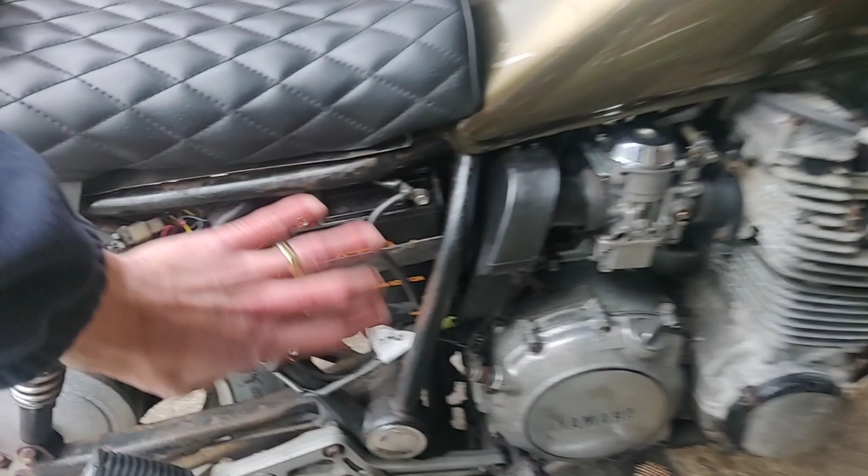Stupid evening, I shouldn't be sober, I'm dangerous. So looking at relocating the battery, looking at thinning out this mass of stuff at the back.

It's also fucking huge, it's a 12 ampere hour battery, quite a chunky battery actually for a relatively small-ish bike. But what I did find was looking around for gel batteries that get a tiny bit smaller - I don't think that's an acid battery - but it's still a lot to hide. Whereas looking at lithium ion ones, as you can tell, they don't weigh anything. Look at that, it's brilliant.

I was just pissing around really, thought well, sat in front of the telly, made up a box. I was looking for a box around the same size, but now I think, tagged on the back - you're getting no benefit of that at all, but actually that builds up my seat nice and highly.

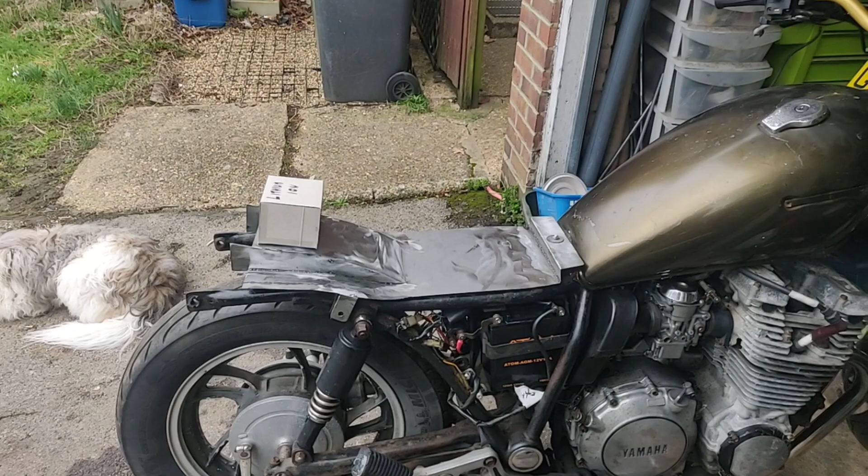Speaking of which, I was looking at it thinking, well, if I'm going to go for a black theme on the bike, I could go for a black and silver number plate because it's an old bike, a historic bike. No, the rules have changed again, and not everyone knows this.

So, oh Christ, 5-6 years ago, UK government changed the law on black and white number plates. It used to be before 1973, I think, you could have a black and white number plate. They then accidentally changed it when they changed the historic tax rules, and basically anything over 40 years old could have a black and white number plate.

They've changed that 2 years ago, I think 2021, and it's now effectively, if it's registered before the 1st of January 1980, it can have a black plate. So this can't - it is registered, built in 1980, but not 1st of January. So it's going to be a yellow plate, which is a bit of a pisser actually.

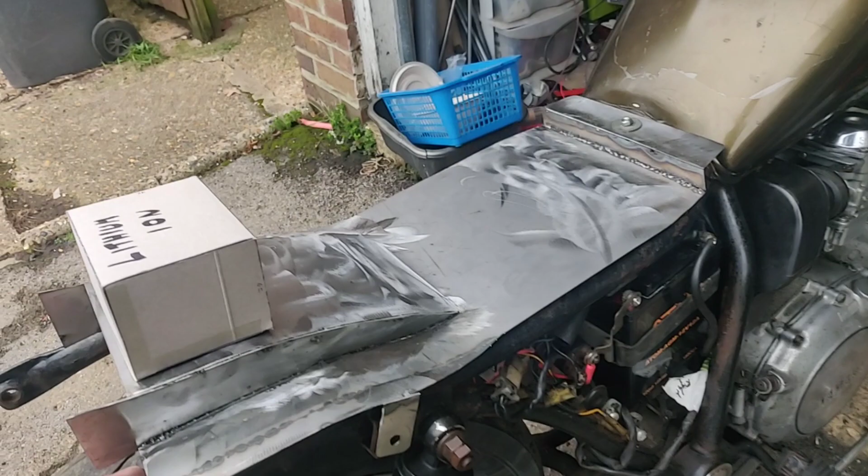I'm slightly annoyed because a black and white plate would have looked awesome, but it's all about where you can mount the plate. So I can have a lovely, relatively flat black back profile. I am going to have to leave a bit of space, obviously, like I have there for the swing arm to swing.

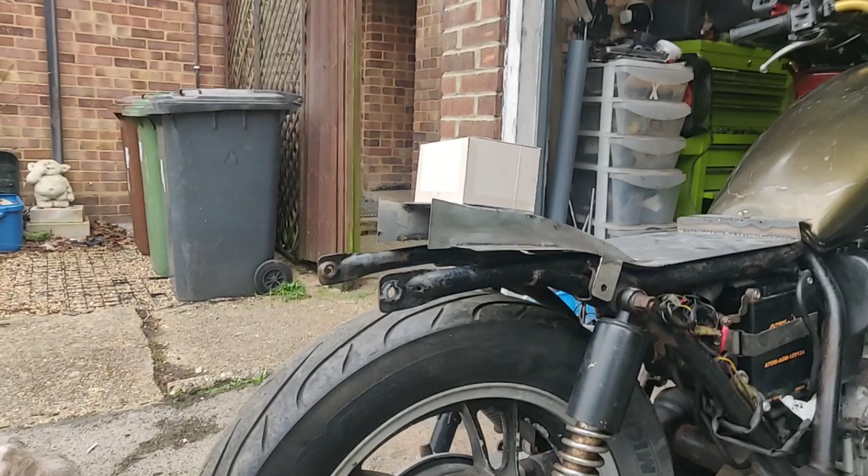But I need a bit of a plate for the plate. So my thinking is, and I've not done this yet, I'm doing it live because you're joining me thinking, which isn't normally a group sport.

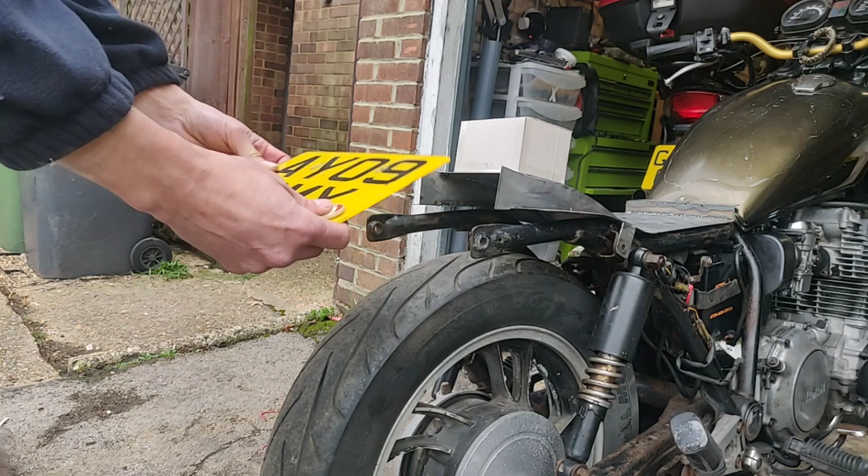This isn't a plate from the bike. What's this from? Oh, it's from the Shiver. You know, if I've got something built up to hold that battery, it holds the plate up there, which actually is probably not far off what I'm after. That's my thinking, let's bring it around here a little bit.

Oh, look at that, might even sit flush. So I don't think that's all that far off. That's a little bit tight there, but if I get rid of that bottom piece, which is just an advert anyway.

So I think I'm going lithium as far as batteries are concerned. We'll have to see how that works out in the long term. I know there are issues with lithium batteries, less than there were, overutilisation, etc.

I was worried about charging because I had read about it needing a different charger. It does, it just can't use one of the old retro ones, and I do have some more modern chargers that will work. That wasn't my concern. My concern was, if you can't charge it off a standard battery charger, how does the bike recharge it? But that doesn't seem to be as much of an issue as I initially thought.

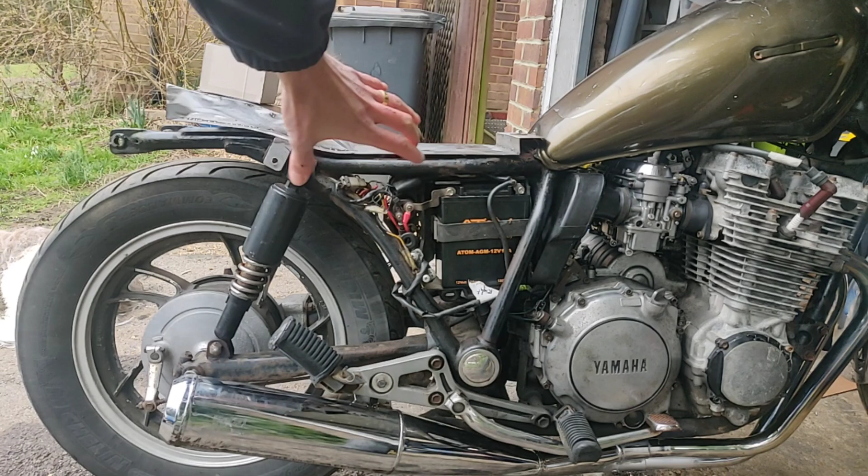So anyway, let's get on with it. What I'm going to do is get the carb off today, see if I can sort out that high idle, which I think I know what the problem is, and see if I can get rid of that airbox and just start thinning out that area. So put my little fake battery away, get rid of the plate, take the tank off, and then start digging this carb out.

Right, so there we go, that's stripped off. I've just basically pulled the manifolds out, chucked them down the side.

Hey, what are you doing, dog? Lady, what are you doing?

Yeah, tank off, seat off, etc. Hot air blower - I mean, these aren't bad, they're still pretty good as far as rubber's concerned, but a little bit of heat, if they start feeling a bit brittle, goes quite a long way. Let's see if I can rock these bad boys off.

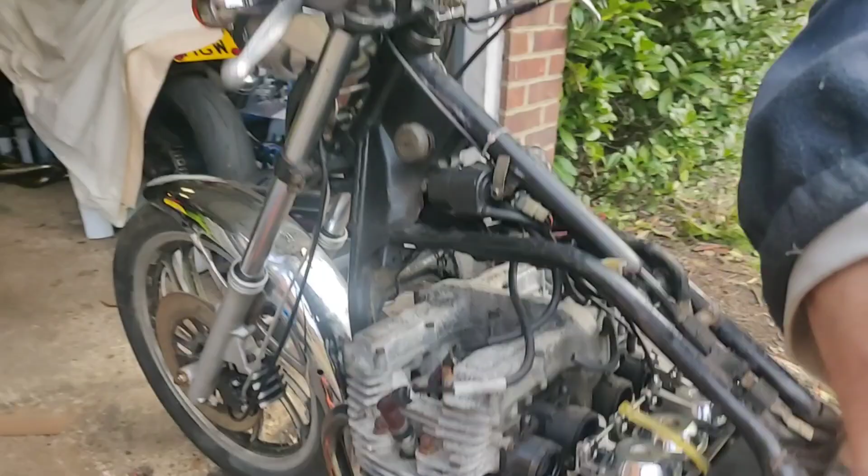Right. Just drop you around the other side. Hopefully my camera won't fall over again. Oh, they're full of fuel, so I need to be a little bit careful.

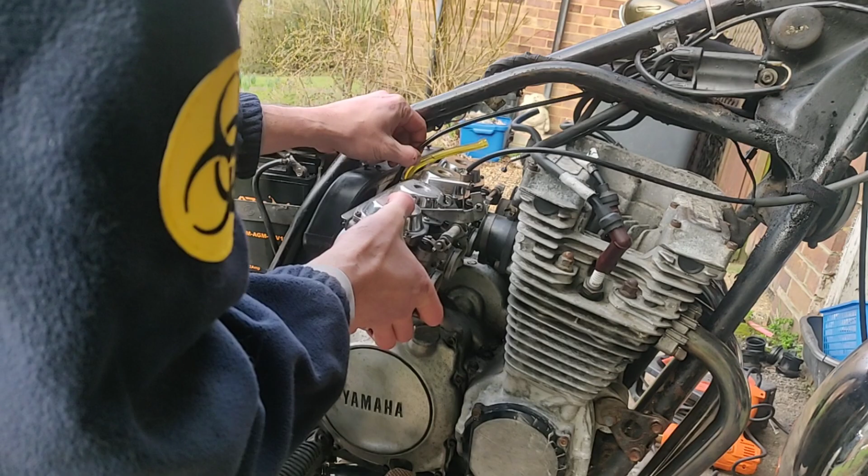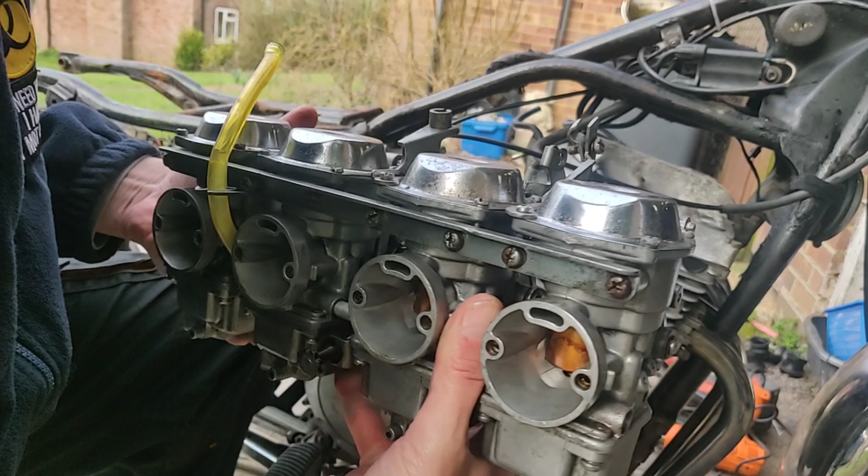Right, here we go, and they're off. I'll keep them upright at the moment, but the idle isn't even on. So yeah, had a good, what, 3 full twists before it even engaged. So I need to have a look at that.

But I need to drain it first, so I'm going to do that off shot because it's mucky more than anything else.

Get that done. Right, just to drop you back in, I managed to wheedle out that airbox, damaged it, which is a little bit annoying, but it's nothing that can't be fixed or repaired. I'll keep it for now, see how I go.

Starting to see the effect. Look at that, that really opens it up. I didn't quite realise the battery box was separate, but that's quite handy because it means I can get all that out of the way without having to worry about dropping the battery on the floor or running longer leads etc. Right, I'm going to start breaking into that carb, I think.

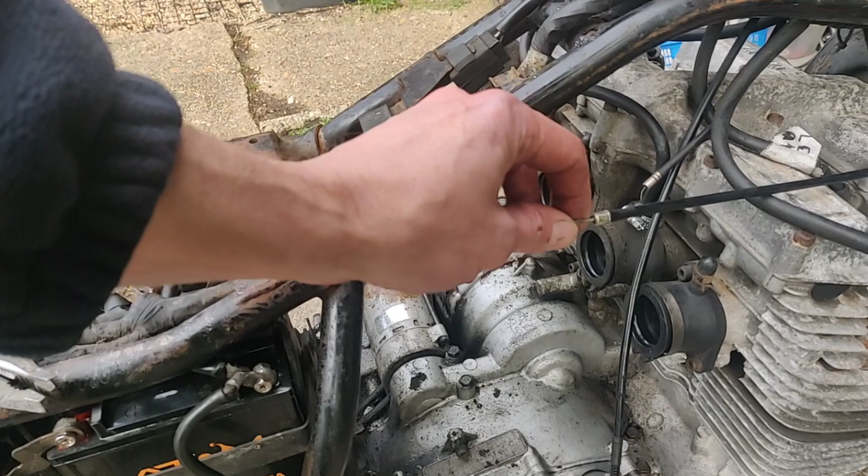I'll start off without you because I'm at a good point in my audiobook.

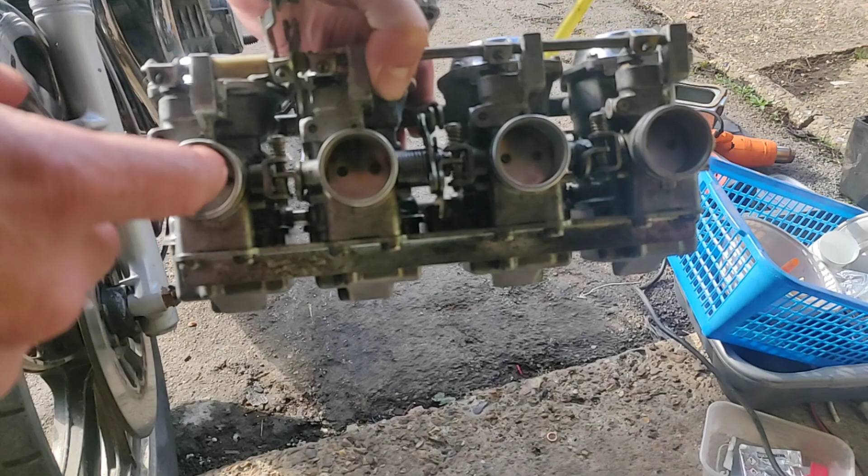Right, so much time later and a few real world distractions, I thought I'd give a bit of an update on these carbs. Now I was sure that I'd got these up when I was balancing the butterflies. I'm less sure that I have now, but I've given a base 0 bench balance. Base 0 bench balance - that sounds quite good actually.

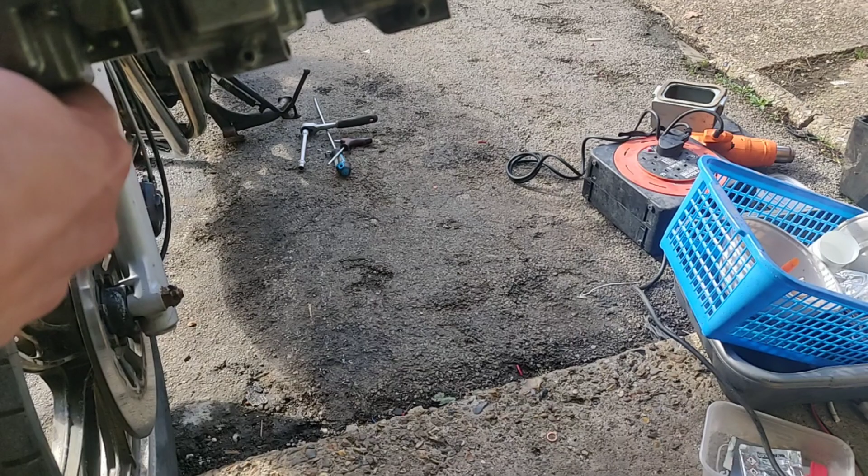I've also measured up the air ends for pods.

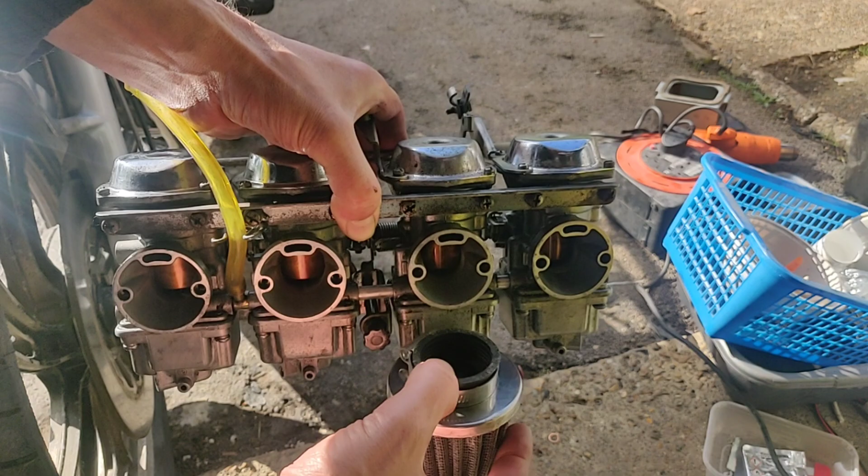What's it doing? Okay, where's it gone? Well, now the slight issue with pods, particularly with carbs, is you've got all the airflow, so they are actually air jets - that is an airflow. This is too small, it's a bad example, but you can see you've got the lip round the edge that will go round the edge. Obviously this isn't going to fit, it's too small. But it's the inner lip that causes all the issues because it blocks a lot of these carbs.

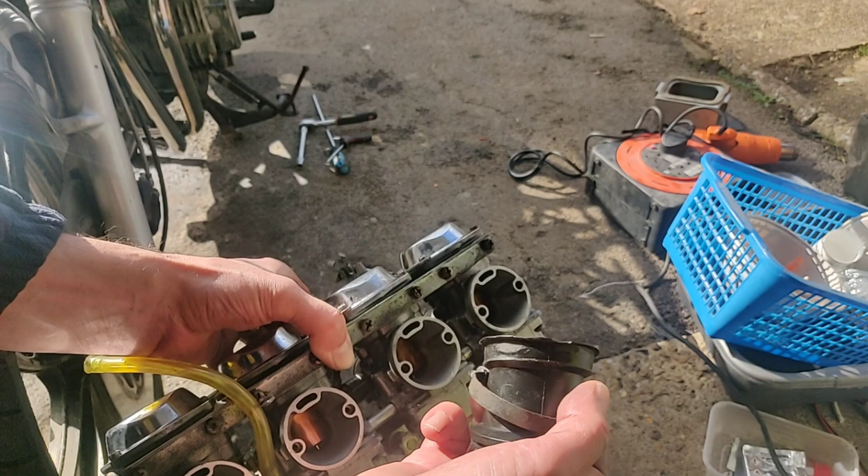I'm just going to work out how I'm going to get around that. Now, one possibility is to use the old rubber boots that went onto the airbox that obviously fit.

Don't impede any of the elements, and leaves me a clamping surface around the edge to get the pod on. Or I could just make one big pod, essentially making another airbox, which is a bit of an arse to be honest.

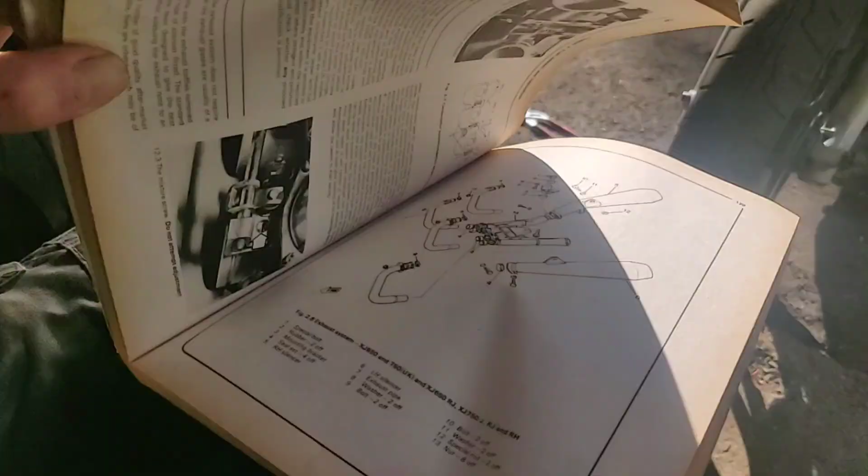Don't know, just thinking. The bit that I did dig in on though, let me see if I can find the chapter in my book, it explains it a bit better. Right, found it. It feels like Jackanory reading a book on my lap with you looking over my shoulder. So this is the Book of All Knowledge, Haynes Manual, and this is what I'd read before and just thought, yeah fine, not a problem, I'll do what the book says. So on the exhaust system, yada yada yada, air fuel mixture screw, do not attempt adjustment.

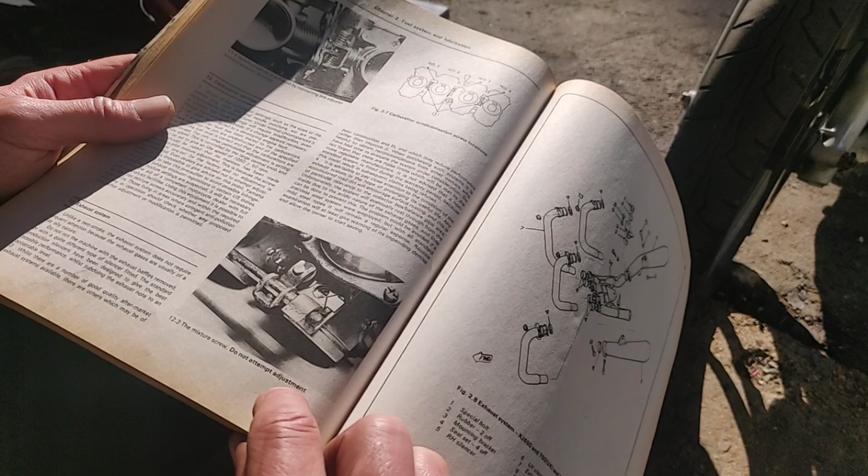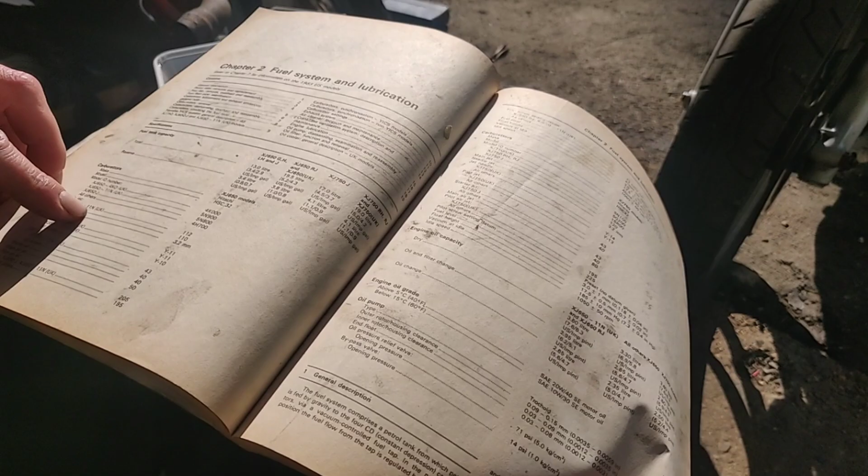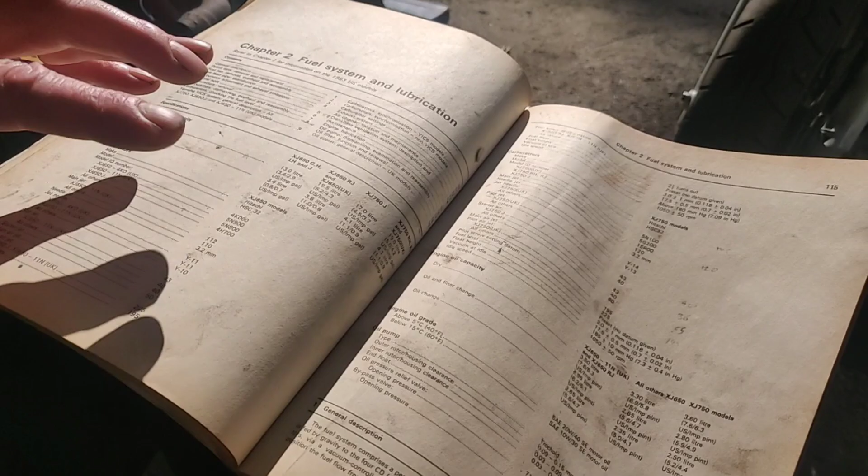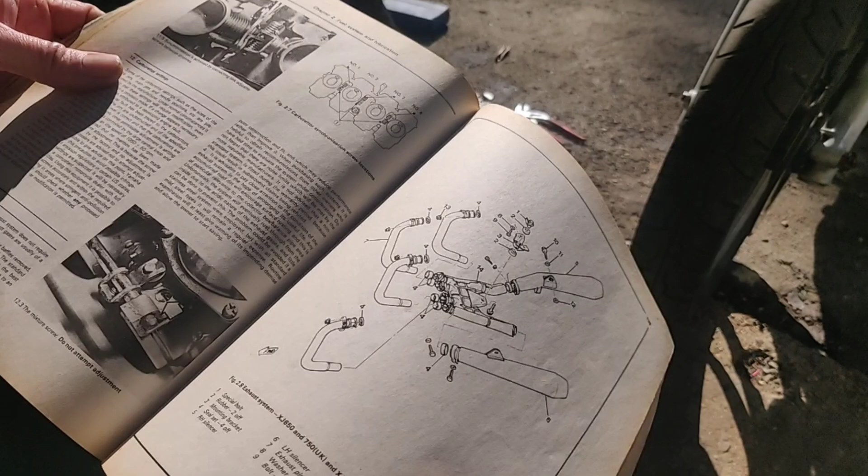So I didn't. Seems strange, but then earlier in the book, what it's actually got under the specifications, on this side, 650, all the jet sizes etc. Pilot screw setting datum 2.5 turns out, so it actually tells you what the setting should be, but then tells you not to fuck around with it, which is a bit strange. I hadn't touched it before.

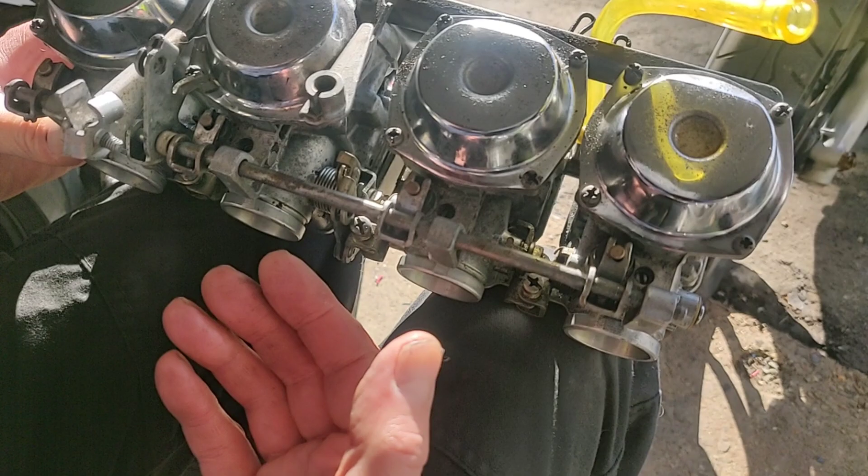I just went through them then, dug them out, because they were quite gummed in, but because I wasn't going to touch them I wasn't bothered. And I went through and I have unscrewed each all the way out, screwed each in.

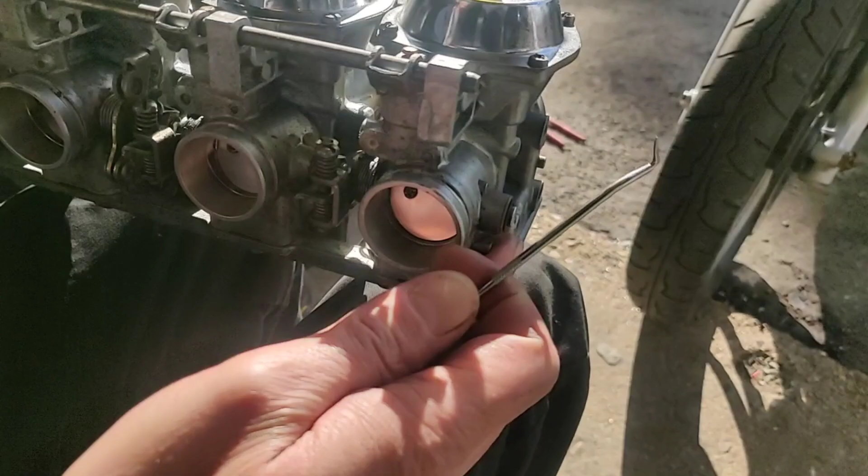Oh, you don't need a screwdriver, you know what to screw in. Let me point. Screwed them all in, all the way in, and then all the way out, backed them out. Cleaned them through. Now that jet comes through to the top there.

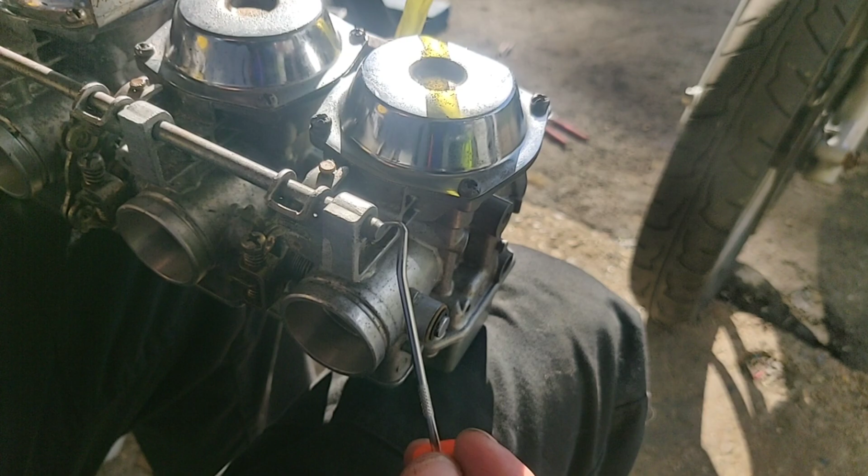That was a bit mucky. Where's that come from? It's just dust blowing around in the air. Yeah, so it comes through. They were all over the place. So I had a 3.5, 4.5, 5, a 2.5, and a 2 I think. So they're all now base set at 2.5.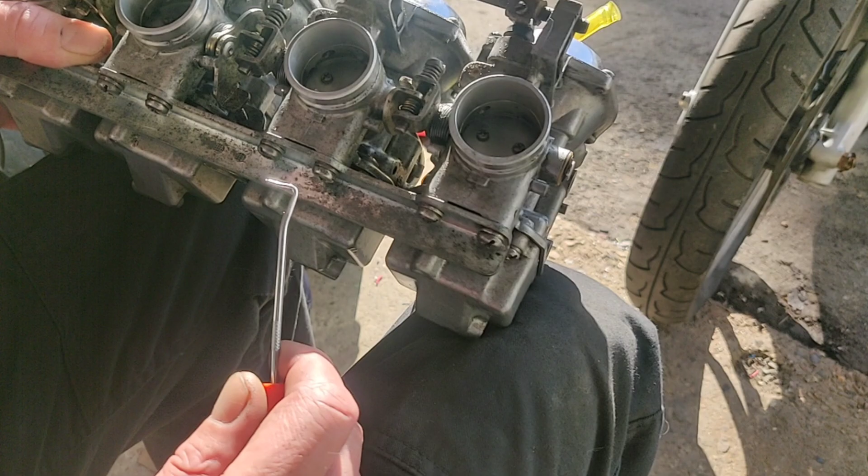And I'm going to try chucking it back on just to see how we look. But they don't look too bad at the moment. Now I don't know if it's still going to do that high revving, there's only one way to find out, and that's to chuck them on and see. Not as clean as I thought they were actually, but they got a good functional cleaning beforehand. They'll probably get another one before it gets anywhere near running.

But I just want to see if it'll run. I also need to chuck some oil back in it, because obviously I've drained it out before. Right, let's get this bugger on. Right, so there we go, bike looking quite skeletal. I've chucked in, well, the oil I took out before actually. Bit of fuel, just have the fuel on standby, because that's obviously with empty carbs, it's just going to gulp most of it up filling up the carbs. And we have joy.

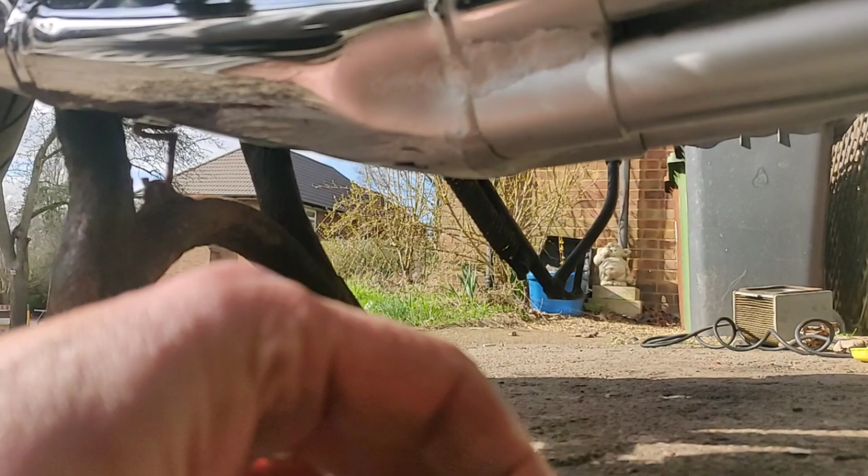Yeah, cool. I tried to show you it running. I'm not sure if you can see it, but the repair job that this exhaust has had on it, shit, there's a big hole at the top there, but that's fine. There's nothing here that concerns me or that I can't fix frankly.

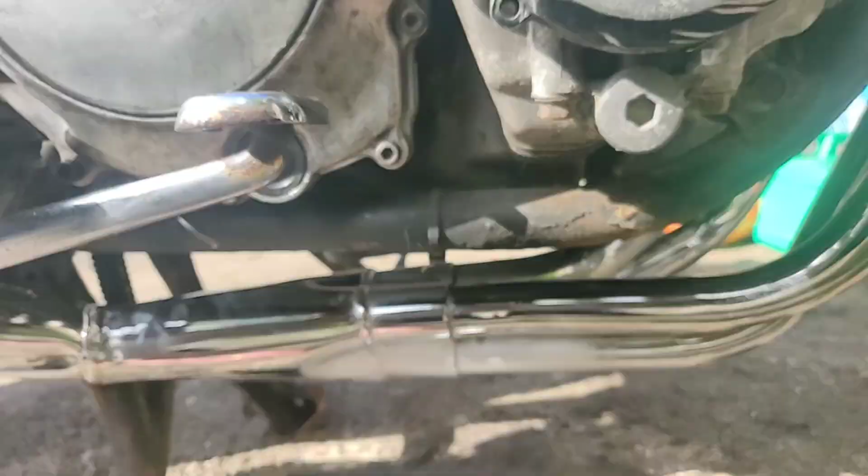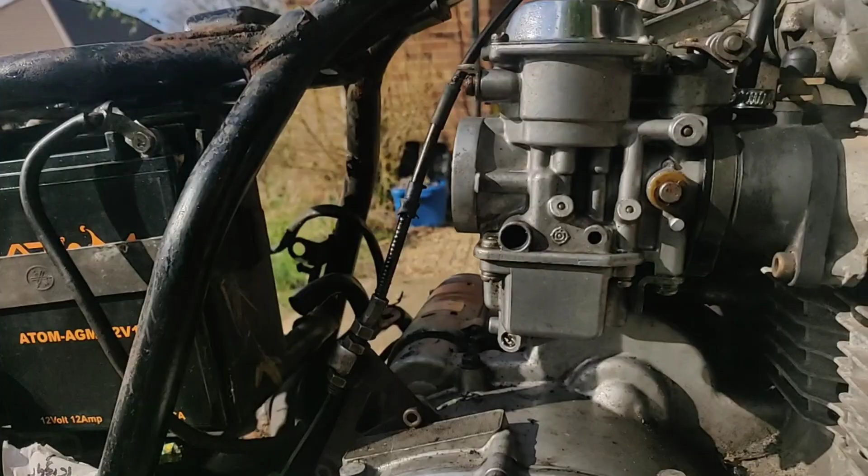It just needs sealing up properly. Happy with that? Right. It's still running very, very revvy and high. But I mean you saw I chucked the cloth on the back, I don't know if that's just air restriction. Do not know, I suspect it probably is.

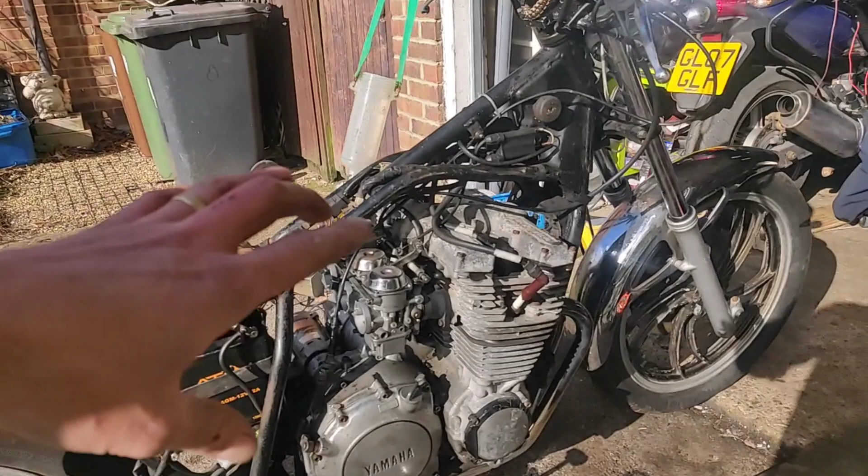But I think that's just going to be one to try out, a bit of trial and error more than anything else. But so it's cool. I need to sort out that collection piece in the middle where they all join together, and see how that works out, just strap it up a bit better. But it is a bit of a misfit to get on in the first place, so something that might have to be done when it's on the bike.

This is the first, it's midday and my voice is going.

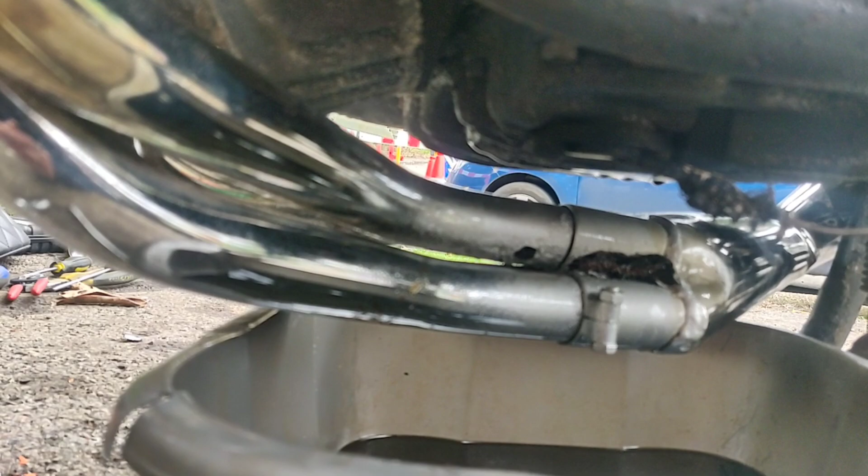Right, there we go, that's the oil drained out while it was warm. You can see on the old exhaust where it's failing, but it's entirely repairable. And for 21 quid, what can you expect, more than anything else? They're a bit of a jiggery pokery to get on, they're a pain in the arse because they cover the sump plug a little bit as well.

But hey, right, so what next? Oh, I'm quite comfy here, laid out on my driveway.

So what was I saying? What's next? Yeah, it's still doing that ramping thing. I think that's because of airflow as much as anything else, because when I chucked a cloth over it, it calmed down a lot.

I'm going to order some pods. I might leave the carbs on. I might drop the oil back in and just give it a go with it like that. I don't know, I'll see how I go for time.

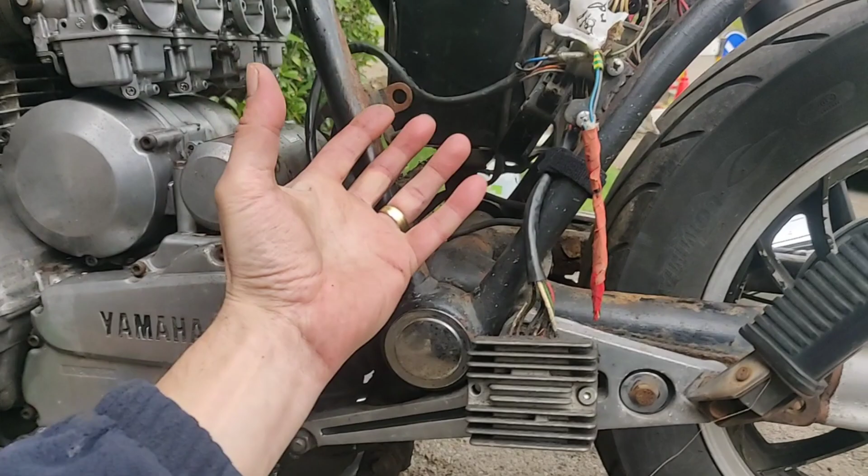Now, obviously, without any of this section in here, this bracketing can all come off the frame, leave the frame nice and clear and clean and all that sort of stuff. I need to work out where things like the rectifier is going to go, probably there, somewhere in the open air.

I've obviously got a new fuse box - oh, it's about to piss down - got a new fuse box to put in, etc. So I just need to try, now I've come to terms with the fact that the airbox is gone, take the battery out, have a look at the space, and then work out what I'm going to do with it.

So it's going to be a bit more of a thinky one and a quiet one on the next one, which I'm sure my neighbours will be deeply appreciative of. Cheers all, I'll catch you later.

Ta-da. There we go, that's the bike's away. It's me packed away just as it starts to begin to want to chuck down.

No surprise for a plenary for me, because I do it quite often. It tends to be because when I'm putting the bikes away, I think of things that I wanted to say and I forgot, and yada yada yada.

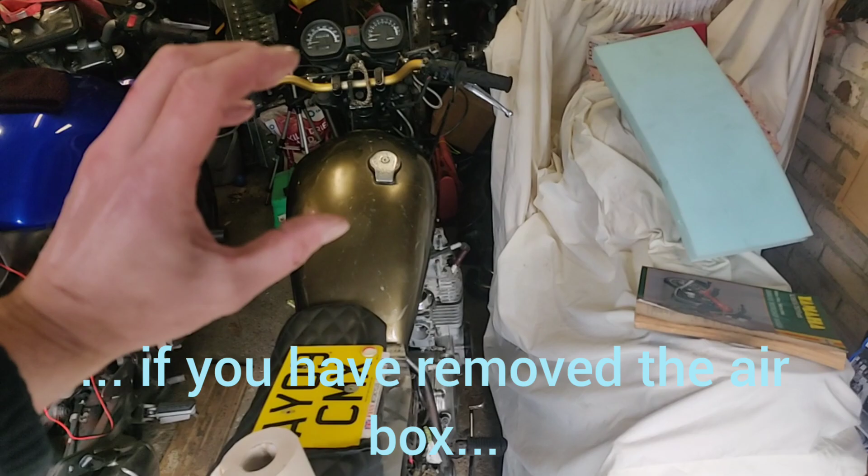Now, my view is no, you don't need to - there's more than enough anchorage on the manifolds to cope. But if you are going to support them, which is viewer's choice, I'll suggest something with some elasticity in it rather than something rigid, so it doesn't rattle around. But I love conversations like that.